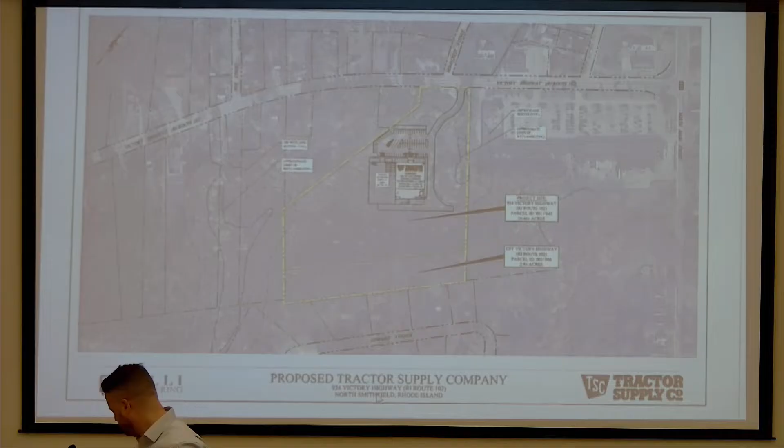I'll switch to the next screen that you had on before, just so it's a close-up.

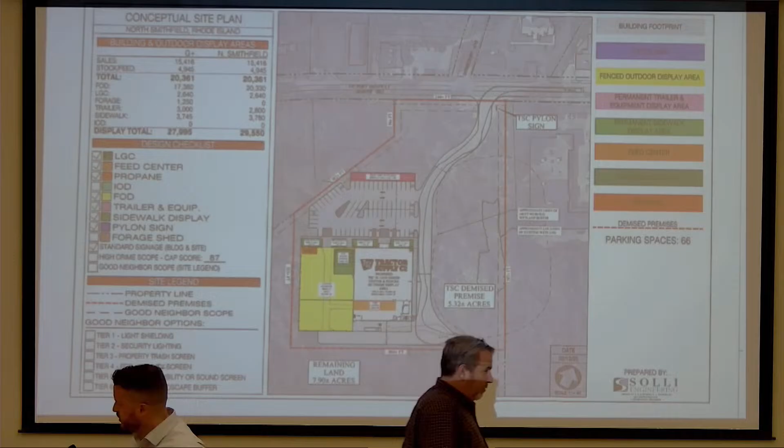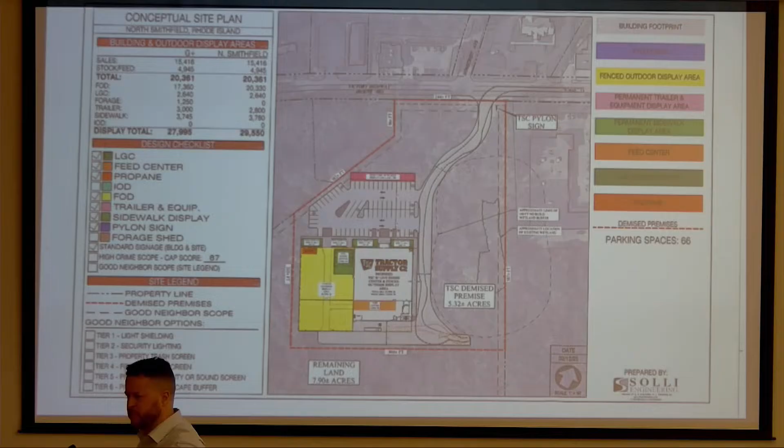The applicant is proposing to construct a 21,930 square foot tractor supply building. With that comes the typical fenced-in outdoor display area to the west of the building, a deep sidewalk along the whole frontage that includes 4 sidewalk display areas, and a parking lot with 66 parking spaces, 4 of which are ADA. There's also a trailer display area in the magenta area to the north of the site, and in the rear we have our loading operations. I want to go through the display areas because I think it's going to be important to get the full square footage of this.

We break down the sales display area. In this plan, it shows it in colors, minus the orange. Ignore the orange—that's internal, not an actual display area.

The trailer space in magenta is about 2,800 square feet. The sidewalk display in green, the lighter green along the store frontage, that's 3,780 square feet. And then the whole fenced outdoor display in yellow, that's 20,330 square feet.

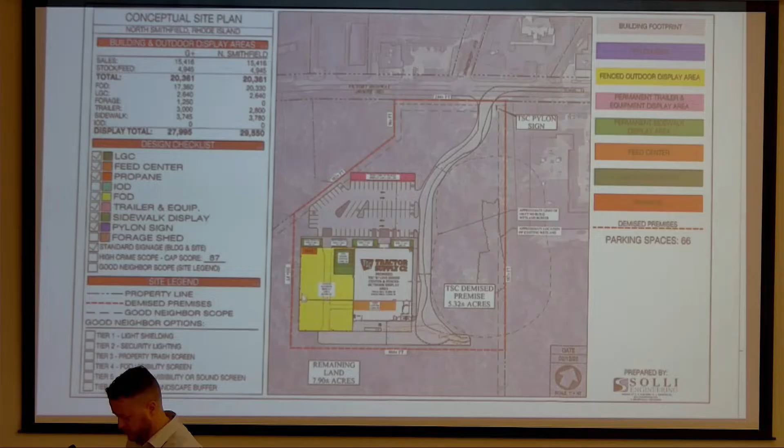And then they have a live goods center, which is kind of hard to explain. It just stores the plants and flowers, but it's not a greenhouse—they don't grow in those. It's just for their sales display.

And for all that totals 29,550 square feet, just the outdoor display areas.

The loading in the rear, the truck will come down to the side, and we have that appendage of pavement off to the side so they can K-turn and back into it. They don't typically do a turning radius.

In the back, it's a movable metal loading dock. They don't actually have a depressed truck well or anything—they back up into it and can move it to wherever they need to. There's also a dumpster in the back protected by bollards. So that's just the loading area.

This is very preliminary, but I did want to talk to you guys about the utilities, because the major one we'd need to do is a water extension. There is no water in front of the site. Everything else will be tied off from the infrastructure that's in Victory Highway right now.

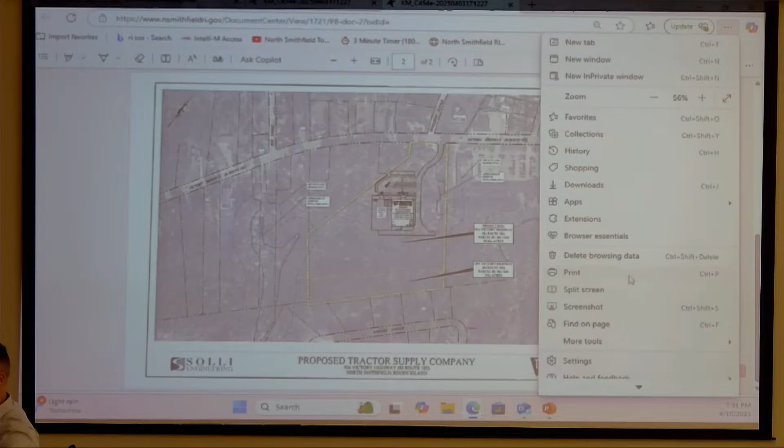But water will have to be—I'll go back to the other slide real quick. There is a main at the intersection here, so we will have to extend a water main about 950 feet to the front of the site to provide water here.

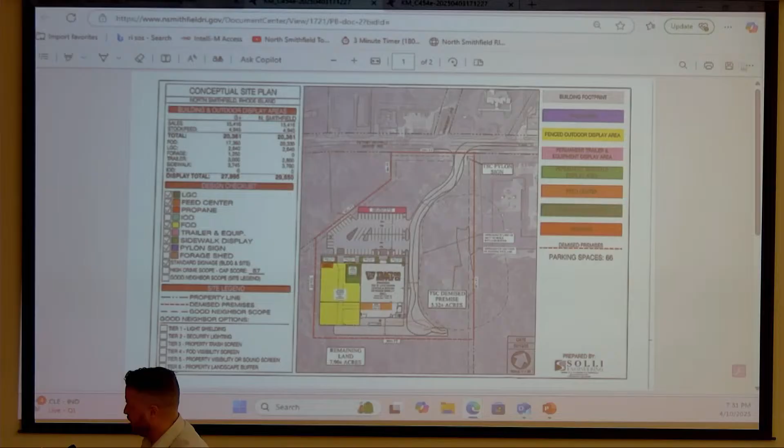Quick thing with stormwater—we don't really want to touch the buffer area, so we'll most likely have underground detention, and then it will come out probably into the buffer area, and then feed that wetlands. We'll follow state and local practices, and we'll be under the peak discharge rates with our detention. So we don't have that designed yet, but I just want to let you know we do plan to follow state requirements.

So we'll go back to the overall. Sorry, I'm switching back and forth with that.

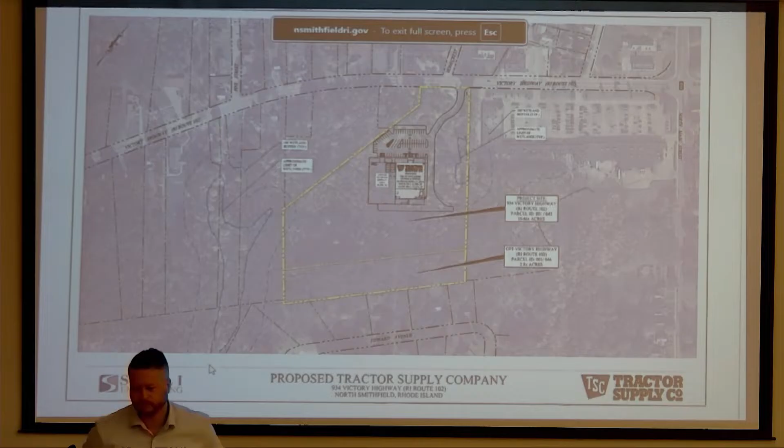As previously mentioned, this is in the business neighborhood zoning district. That zone does not allow for retail services over 40K—it doesn't allow for 20 to 40, but it definitely doesn't allow for over 40. Our building is 21,900 square feet; a portion of that is back of house, so there's only 15,416 square feet of sales area for the building.

But if you add the outdoor display, which I mentioned earlier, the 29,550, you do have a total sales area of 44,966 square feet. So to allow for this use, we would require relief either for the dimensional requirements, or for the use requirements altogether, under the unified development process, of course.

And another thing—if you do treat the 44,966 as the gospel sales area, our parking requirement doesn't work currently for your regs.

It does work for tenant use. They typically like 60 to 70 parking spaces. We are providing 66, and a lot we've designed with 63. So that's their range that they like to go for. 66 does satisfy just the building, the 21,900, but if you add all the other sales area, it would not. So we would need relief from that parking requirement as well.

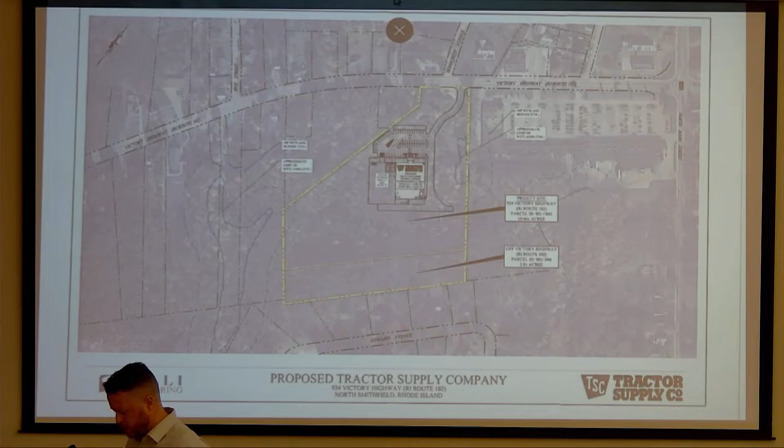The outdoor display of merchandise in the permanent trailer and equipment display area, which is the magenta, includes the outdoor display and sales of bulk propane from a 1,000-gallon tank, the display of welding gas, live plants, shrubs, flowers, trees, and garden products, trailers, pedal boats, and motorized vehicles. The motorized vehicles include mini bikes, dirt bikes, go-karts, scooters, tractors, utility vehicles, and all-terrain vehicles.

The outdoor display also includes sales of hay and forage, and, which a lot of people don't know, pet grooming and washing services and pet veterinarian services. These aren't permanent, they're more like a pop-up — they come in periodically. Similarly, you can adopt a dog there sometimes too. Actually, that's how I got my rescue, at a Tractor Supply. First time I'd ever been to one, actually.

And the pet grooming is not a service that they provide — they just have a tub in there for you to do it yourself. So it's not a service they provide. That trips people up sometimes, so I just want to make that clear.

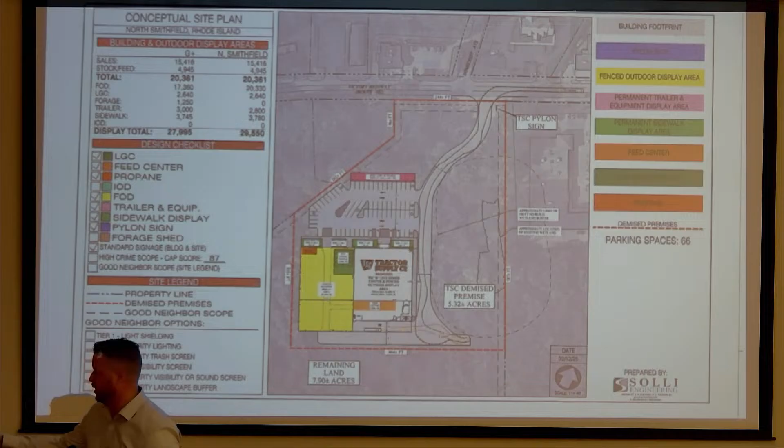I also have another board here, which I apologize I didn't provide a slide for, but I do have 11 by 17s to hand out if you'd like. This is just a prototypical front facade of a Tractor Supply. I'm sure some of you have been before.

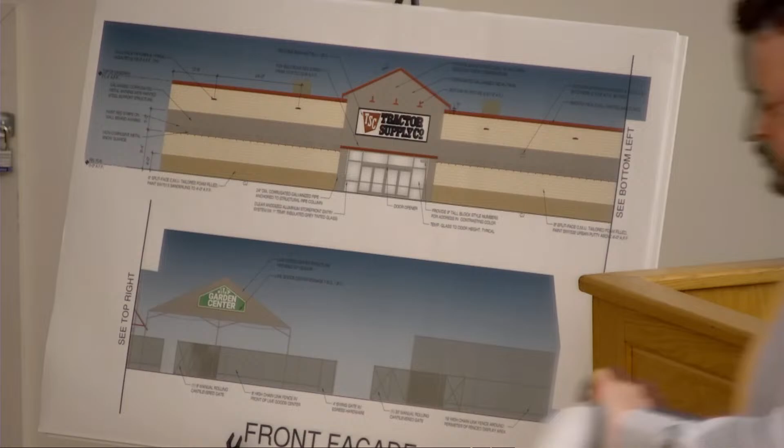Let me hand that out right now. Again, I just have the front facade — the pattern pretty much goes around the rest of the building too. So we have the 8-inch split face CMU, that's the brick, the tan brick and the darker tan brick. They do a 4-foot strip of different paint color, and the rest is a lighter tan color.

There is an awning that goes across the front of the store, sticking out about 4 feet into the sidewalk. The main entrance is a glass storefront that protrudes from the CMU wall, and the gray above it is a corrugated galvanized steel paneling, I believe running longitudinally.

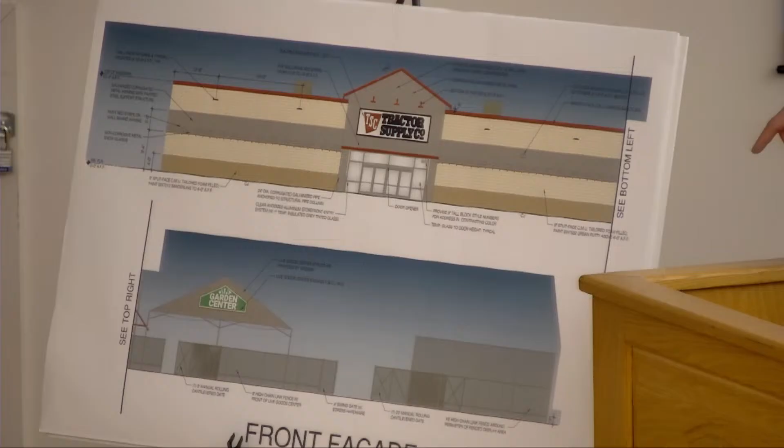Then you have your decorative light fixtures that provide light to the building signage above that. This continues further, so there's a match line here I put because I didn't have a board that long. Beside that, you have the outdoor display fence — wherever there's an entrance, it's only an 8-foot high fence, but it changes to a 16-foot high fence along where there's no openings, which is the majority of the fenced-in area.

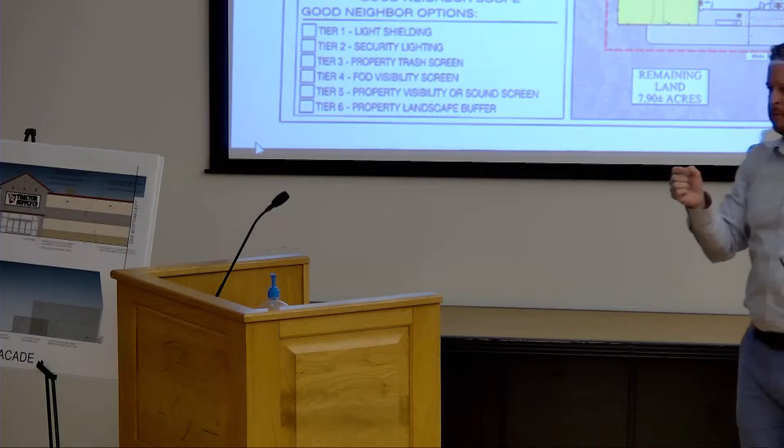No, the demised premise is just something - this is actually a Tractor Supply legal document. It's just their area that the owner of the property will use for billing and payment and stuff in the future. Our limit of disturbance will follow our grades, which we obviously haven't done yet. But we will not be disturbing the buffer. This wetland is currently being classified, so we don't know if it's going to be a 75-foot buffer or 100. That's still in the process of their review. But if anything, there'll probably just be minimal grading, but the LOD line will follow that, and we will not clear anything else beyond the LOD line.

Okay, but between where you're coming in for the driveway and the property line, that whole area, north of there, you're thinking will be cleared out? That is a good question, I am not sure about that, but I see what you mean for visibility.

Yeah, I mean, I don't want to take away the building as a billboard, but at the same time, you're entering into a residential area. So I want to make sure that we're balancing the commercial and the neighborhood, because we're a business neighborhood. I want to make sure we're balancing that and not just clear cutting the site to drop the building in. And there is a pylon sign also, so the building itself is not the only signage, so I think that's important.

Right, yeah, I'll definitely take that into account when we design this. I mean, if you're looking for live feed, if any of those apple trees are still in commission, you can keep those around. I'm a little partial to them because that was an old family farm of mine, so glad to see that it's going to start getting put back to use, but I'd like to see some apple trees continuing. I used to pick those.

Yeah, unfortunately. Mr. Menard? So I know there was mention of a dumpster. Yes. I would have concerns or a request that the dumpster be in some type of fenced enclosure, just to contain any debris that got loose that would not go onto a neighbor's property. Try to keep it somewhat contained - well, and even for visibility through the trees and stuff.

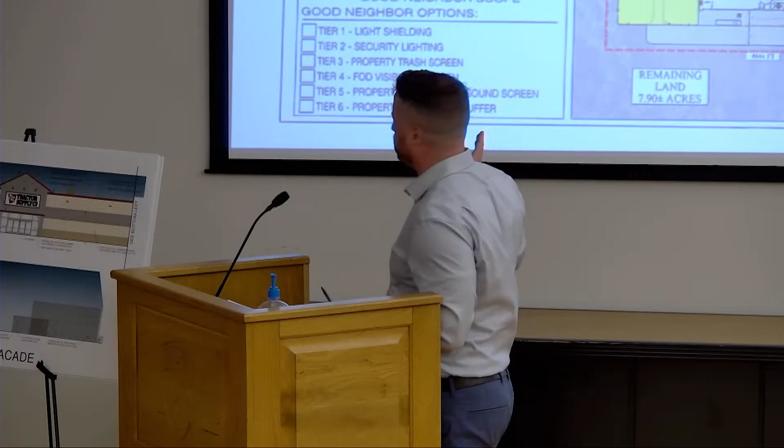Yep, no, that makes sense. You're gonna have this stuff flying around potentially, and we'll try to mitigate that. So we start off with the prototypical, and that is their prototypical. And that is a common question we get all the time, and they oblige all the time, so.

Go ahead. We're talking about extending the water line a little bit. There's been another applicant before this board that's extending the water line even further past this property, Slater Estates, right? I don't know where that project stands, but it might be worth some coordination between the applicants. I don't know if one's going forward and the other is not, but I know that has been in front of our board previously with the extension of the water line, so it might be worthwhile having some coordination call for both applicants to understand what's being done. We can certainly put the applicant in contact with the Slater Estates development.

My most recent understanding on that is that it was for sale. Okay. And a condition of that approval for that project was that they extend the water line all the way down into Slater Estates and then looping it around. That was an expensive proposition for that development, and likely the reason that development hasn't happened. Right, okay.

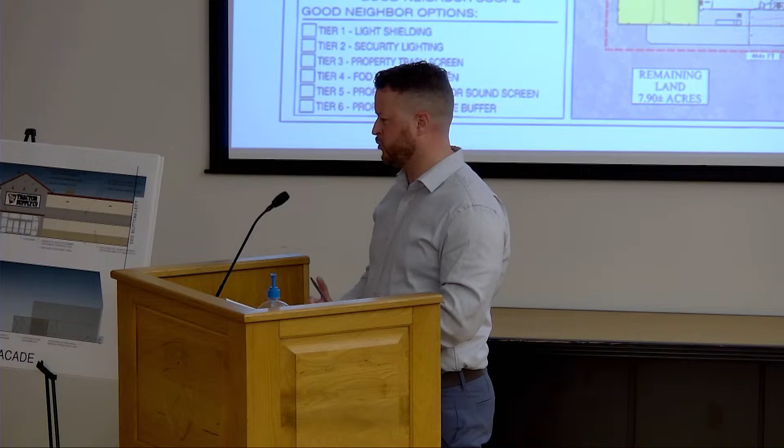Yeah, I can definitely talk to Tractor Supply and our client about any architectural upgrades they might be able to make. I've seen that done in the past, so yeah, I can definitely reach out.

And I think it speaks to what Mr. Porter brought up about not clear cutting those two areas on either side of the drive, because that's a way to make it very attractive. I don't know if you hold gas grill events where people might be doing some cooking to help sell gas grills, but— Not that I know of. If there's anything like that, picnic areas, even for the employees, all those things go a long way to making it much more community based as opposed to something industrial.

Is it my turn? It's always your turn. No, it's okay, I had a couple of questions. So you mentioned part of what's sold in the outdoor retail space includes motor vehicles, different types, which I assume is ATVs and scooters, whatever. Yeah, not every store does it, but they'd like to give the whole gamut to the planning board.

Are people allowed to test drive them? No, they can't even put gas in these—that has to be done all offsite. Okay, very good.

The other thing is, since you're going to analyze the parking requirements a little more, there's a small trapezoidal parcel on the northwest side. Have you considered acquiring that, which would give you more frontage, potentially allowing for separate two curb cuts, but also give you room for more parking and still give you room for a treat area and all that kind of stuff? That is well above my pay grade, but I can definitely ask the client.